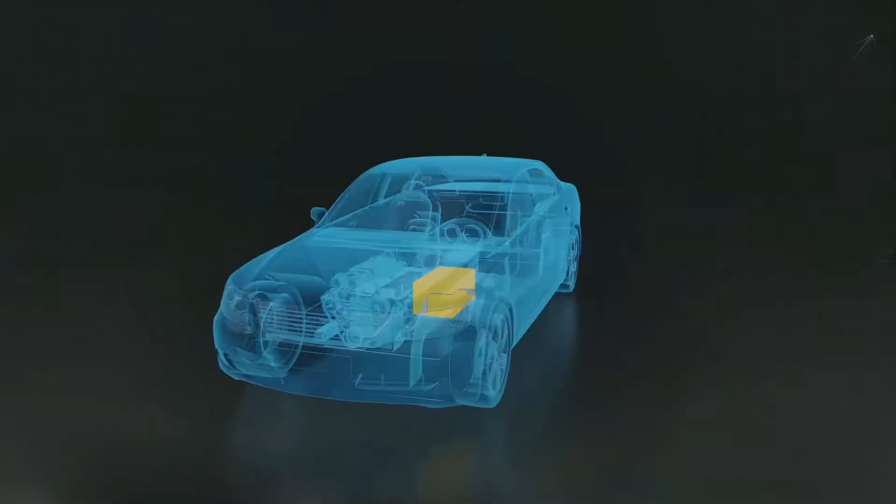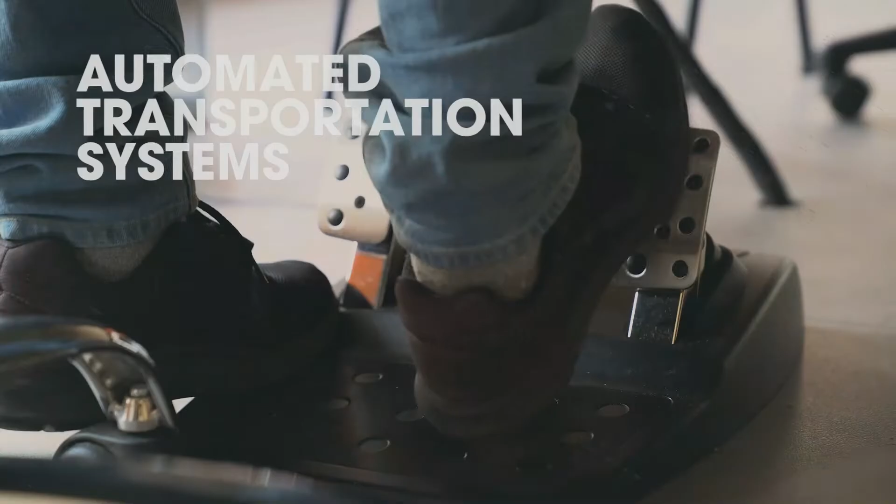Three main research areas are addressed: green and automated vehicles, integrated and connected mobility, mobility and logistics. The challenge is to develop technologies and solutions capable of reducing the environmental footprint through electrified powertrains and chassis systems, improving safety through automated and connected vehicles, advancing automated transportation systems, and city logistics.

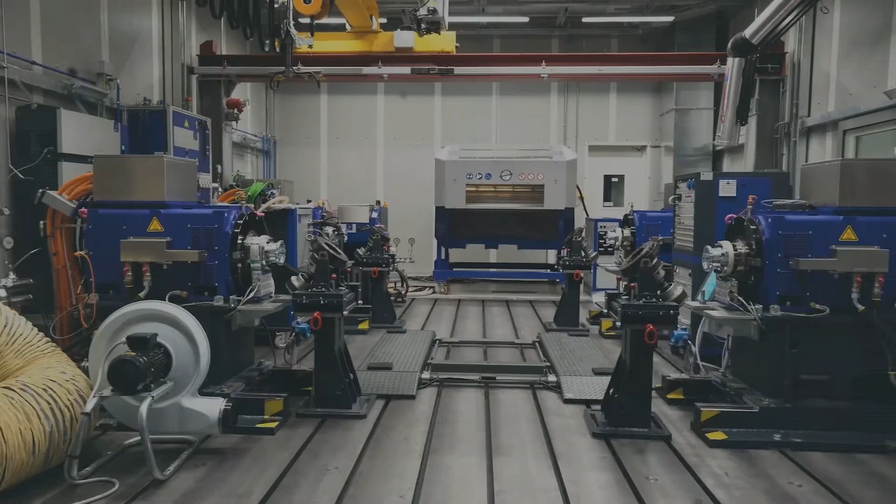To reach such ambitious results, the center is dedicated to the creation of an environment in which multiple skills can be integrated to carry out multidisciplinary research open to innovation and technology transfer.

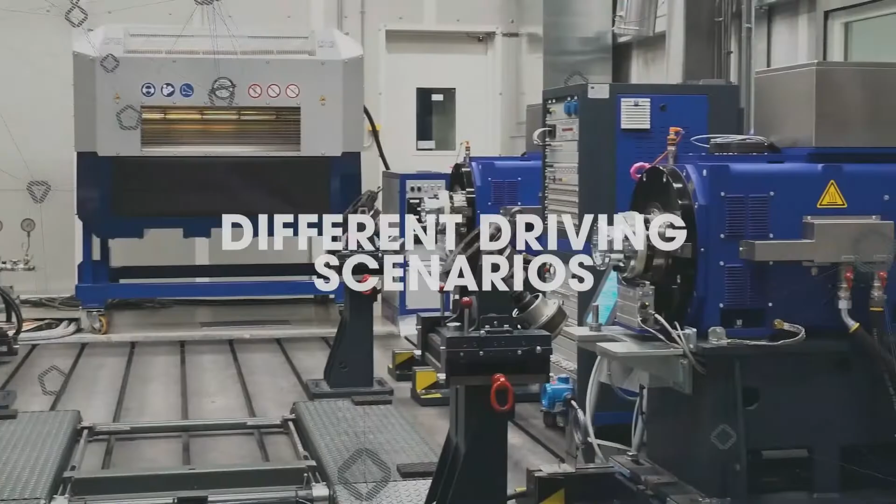The installation of a new test facility within CARS labs allows testing of vehicle and powertrain behaviors in different driving scenarios and road conditions. It is almost a unique test facility available in a university laboratory worldwide.

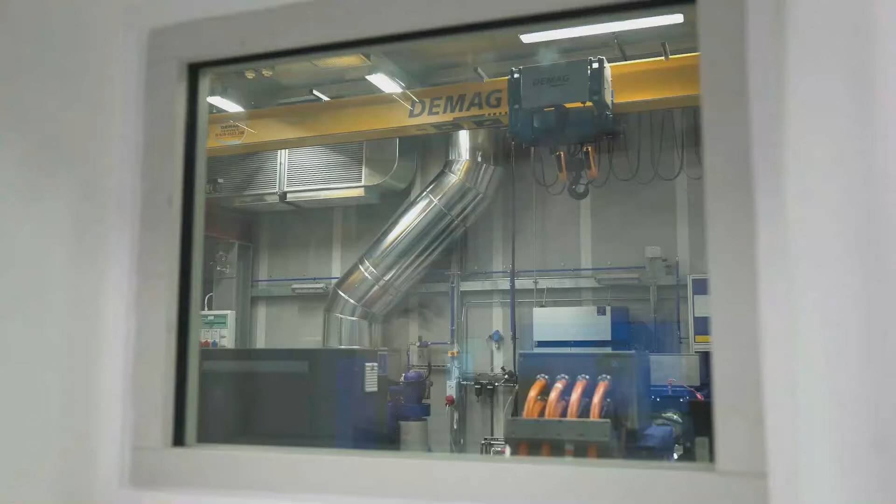The facility is conceived to test both complete vehicles, conventional, hybrid, full electric, and powertrains, or parts of it, to reach a wide range of customers: OEMs, Tier 1 distributors, legal entities.

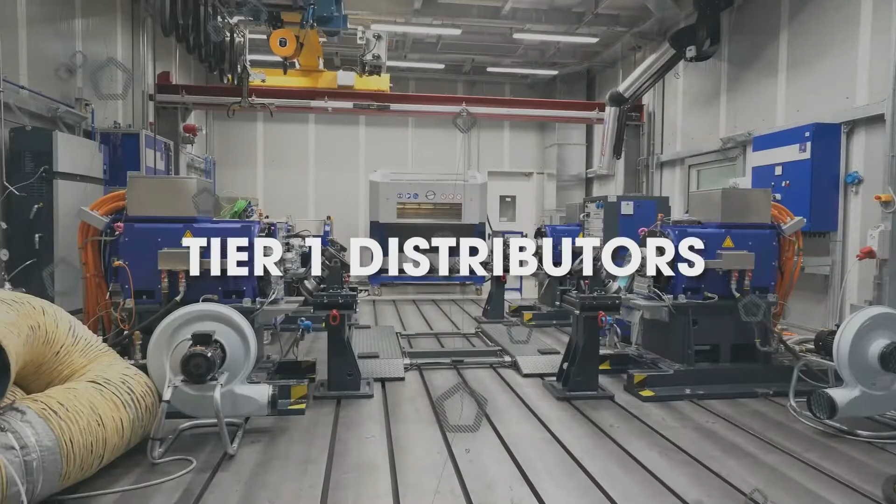The cell allows testing of cars and light commercial vehicles characterized by up to 3.5 tons of curb weight, a thermal power unit up to 375 kilowatts, electric power systems up to 250 kilowatts, and a max speed of 180 kilometers an hour.

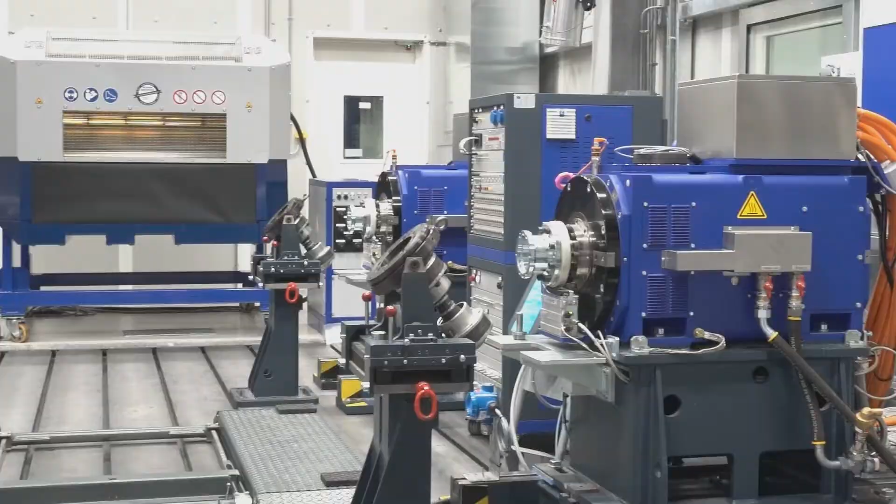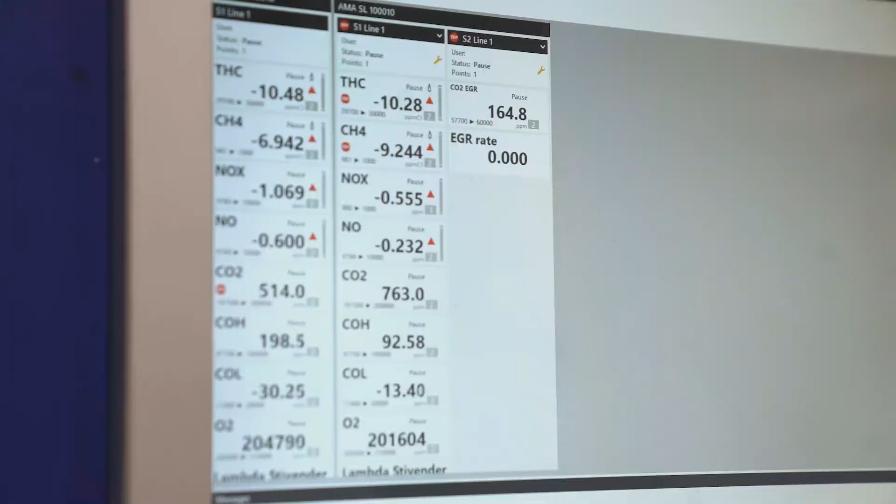The facility is equipped with the following instrumentation: a battery emulator, 250 kilowatts, 800 volts; a fuel measurement device, less than 0.1%; a gaseous pollutant measurement system, AVL-AMA-SL; and a real-time connection device with real or virtual driving simulators, AVL Testbed Connect.

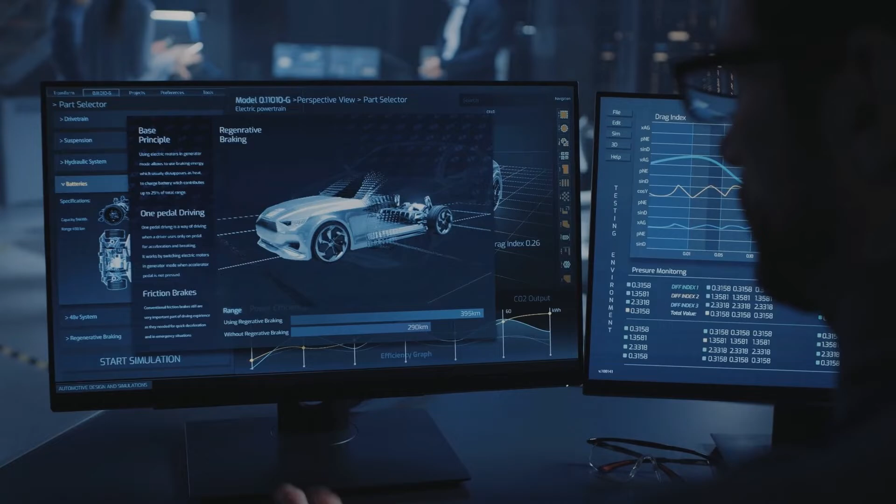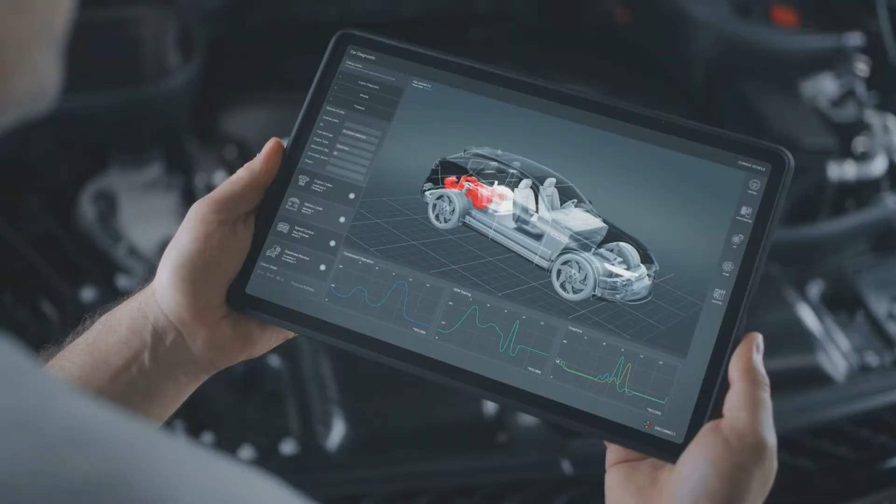Test campaigns are possible both in vehicle and powertrain configurations. In particular, the cell capabilities allow performance tests in real conditions. Efficiency and energy consumption can be derived for homologation and other relevant driving cycles. Furthermore, validation of control strategies for the energy management system and hardware-in-the-loop tests for real driving conditions can be performed.

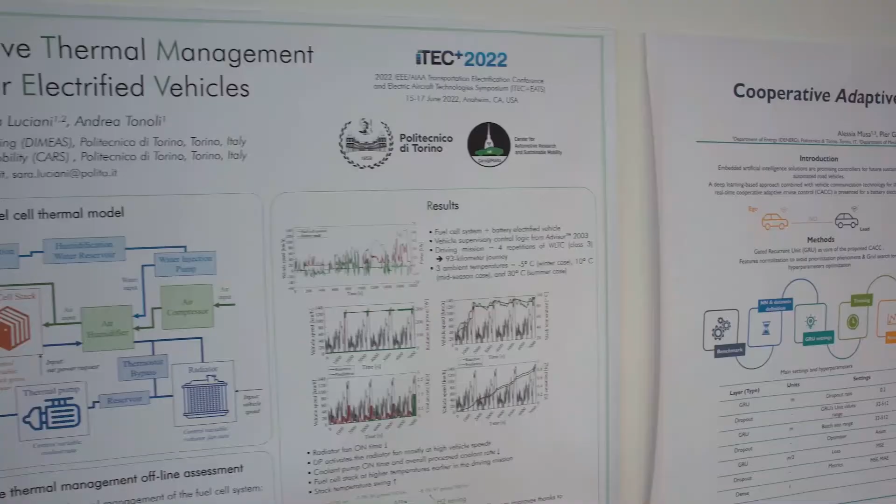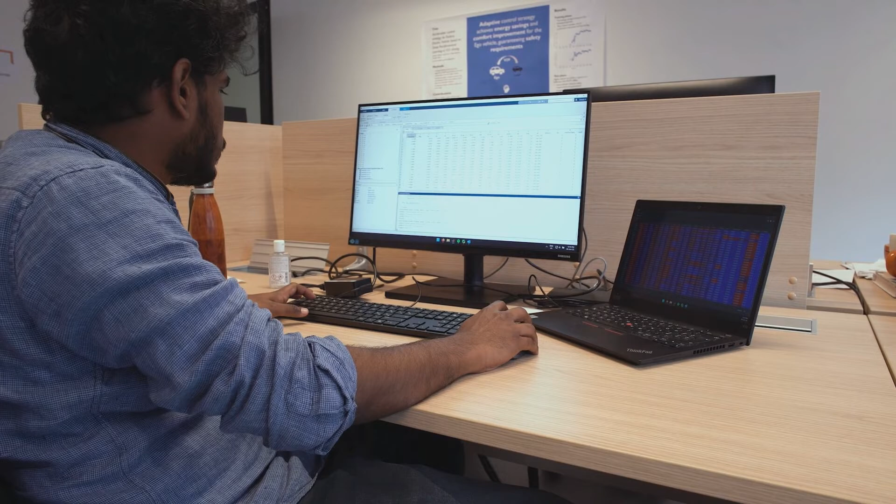Some additional explanation after this movie. Remember that CARS stands for Center for Automotive Research and Sustainable Mobility. CARS is one of the 13 interdepartmental centers established in 2017 and 2018. It was a strong action from Politecnico di Torino.

The conviction was that a multidisciplinary approach should be followed to face the next frontier of research. How to implement this new approach in automotive engineering? We believe this can be achieved by including partner research teams in our research groups, carrying out development plans led also by professors of Politecnico, following a multidisciplinary approach to achieve results with high technology readiness, and performing experiments also at system level.

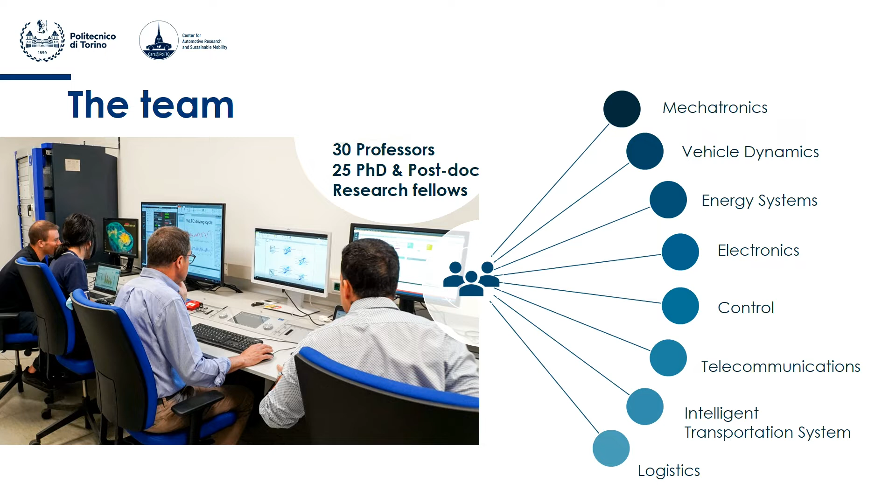Today we contribute in three main research areas: green and automated road vehicles, integrated and connected mobility, and transportation systems and logistics. How? With a team composed of 30 professors and 25 PhD students and postdoc research fellows, with expertise in mechatronics, vehicle dynamics, energy systems, electronics, control, telecommunication, intelligent transportation systems, and logistics.

This work is in strict cooperation with many of the other interdepartmental centers mentioned before. As for the testing facility, starting from now we will contribute with it, helping to shift from field tests to laboratory tests.

This is to be as competitive as possible for Politecnico, but also for our industrial partners. We should remember that today the time to market of a passenger car, from concept to production, is 4 years, so we need to be effective to fulfill this time frame.

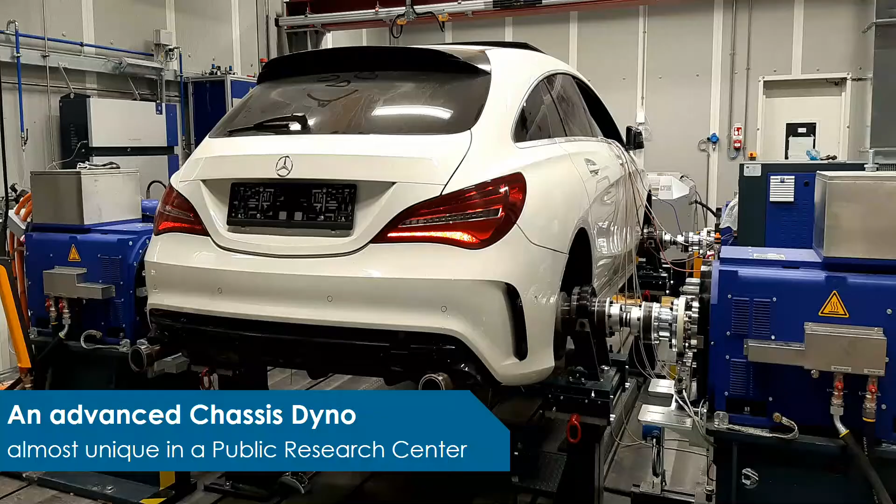To this end, we believe the most adequate infrastructure is a chassis dyno. This chassis dyno is based on 4 independent dynos able to replicate low friction ground conditions independently at each wheel, giving the highest level of flexibility.

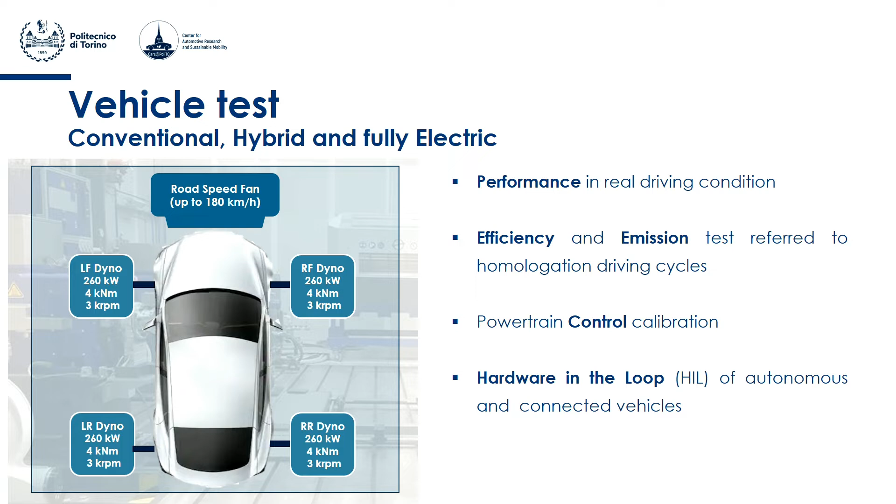The test bed has been conceived to be used in vehicle configuration, to run tests on complete vehicles replicating real driving conditions, to compute efficiency and emissions referred to homologation driving cycles, to calibrate powertrain controls, and to perform hardware in the loop testing of autonomous and connected vehicles.

But the test facility is also conceived to test naked powertrains. The 4 typologies of tests mentioned before can be replicated for powertrain assemblies as well, not only for vehicles.

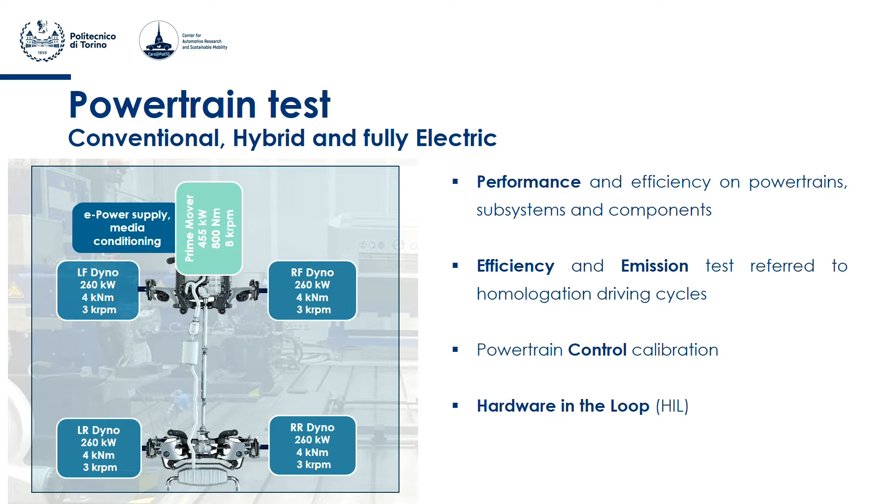And to maintain the highest level of flexibility, we completed the installation with an electric machine, a so-called prime mover, able to replicate an internal combustion engine in terms of stationary torque and higher order harmonic torques.

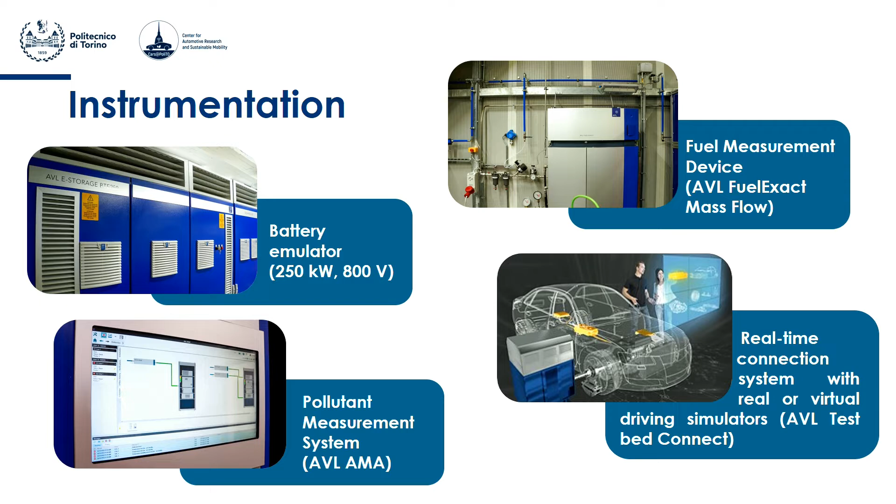The test infrastructure is equipped with a wide set of instrumentation: a battery emulator, a pollutant measurement system, a fuel measurement device, and a real-time connection system that allows connecting the facility with virtual or real driving simulators. This is to widen the typology of tests as much as possible and to meet the needs of our partners and customers.

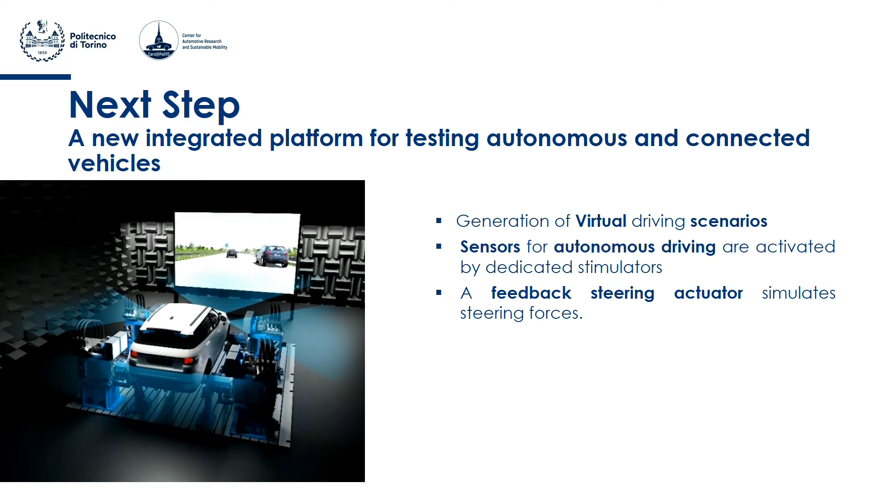Next step: thanks to the funding coming from the PNRR initiative, we will integrate the facility with a new platform equipped with a system stimulating the sensors conceived for ADAS.

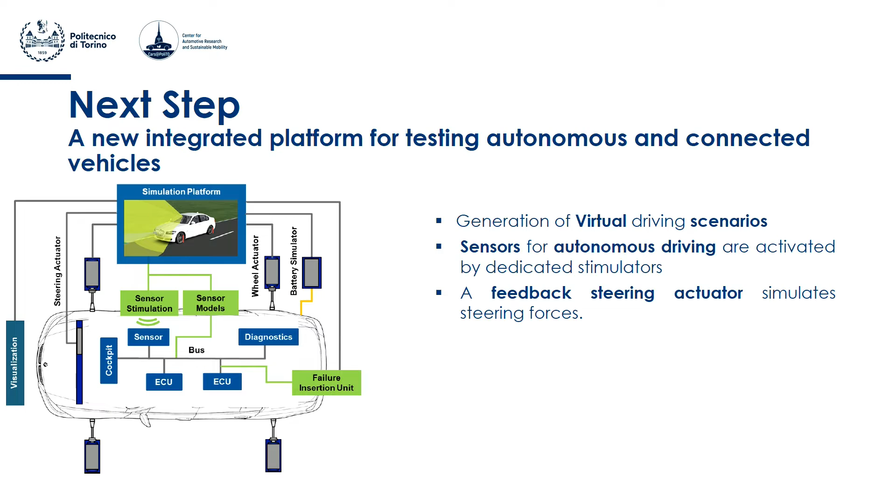With a device able to replicate the steering actuator, since in the test facility it's not possible to steer the wheels, and with a generator of virtual driving scenarios, this will allow running intensive laboratory tests, having a chain in which everything is real apart from the scenario.

We believe this is extremely powerful because the experimental tests requested to validate the technology for autonomous driving are huge.

The executive director of Bosch declared that to validate the technology for autonomous driving, 250 million kilometers are requested, which means more or less 3,500 vehicles involved in parallel for 1 year.

I would conclude that this is almost impossible. So the trend is to move field tests into laboratory tests as much as possible, since they are much more repeatable and can be extensive. We can also run them 24 hours a day.

So to conclude, and I hope that you will visit our laboratory to better understand all the features of this installation, I would conclude by summarizing the typology of possible collaboration entering into our new mindset of collaboration with companies, mainly based on long-term research partnership agreements, collaboration in funded research programs, dedicated research projects, and also the use of the test facility as a service.

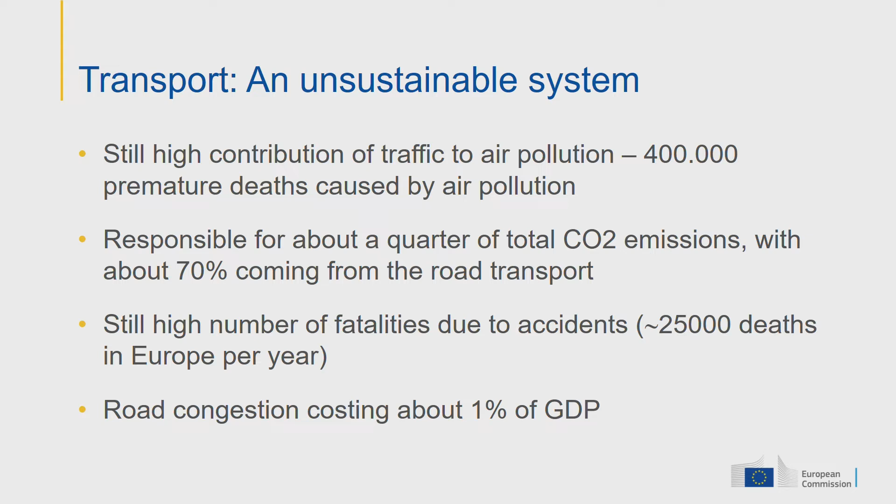So why do we consider that this new testing center is important? We all know that the current transport system is an unsustainable system. There is still a high contribution to air pollution, which causes about 400,000 premature deaths in Europe every year. Transport is responsible for about a quarter of total CO2 emissions, with road transport accounting for about 70% of these emissions. Still a high number of fatalities - about 25,000 people are killed every year in Europe due to accidents, and many more are injured. And then road congestion, which we experience every day and costs about 1% of the European GDP.

So a lot of problems that the European Commission is trying to address with a number of policy initiatives. I've just listed here some of these initiatives: the European Green Deal, the Sustainable Smart Mobility Strategy, and the EU Road Safety Policy Framework. These policy initiatives set very ambitious objectives. For sustainable mobility, we have the objective of reducing CO2 emissions by 90% in 2050, with the phasing out of combustion engines in 2035. In the meantime, we'll have stricter emission limits - we expect the new emission standard to be presented in a few days.

Smart mobility: there is the idea of improving the efficiency of transport by promoting multimodality, so we need to achieve safe and efficient connections between different modal transport systems. Resilient mobility: we have all experienced the impact of recent crises, from the pandemic to other international crises, and we need a transport system that is resilient against future crises like those of the last couple of years. Then Vision Zero, having no fatalities by 2050. So very ambitious objectives that will require time to be achieved, but we have a lot of concrete issues that we have to address right now.

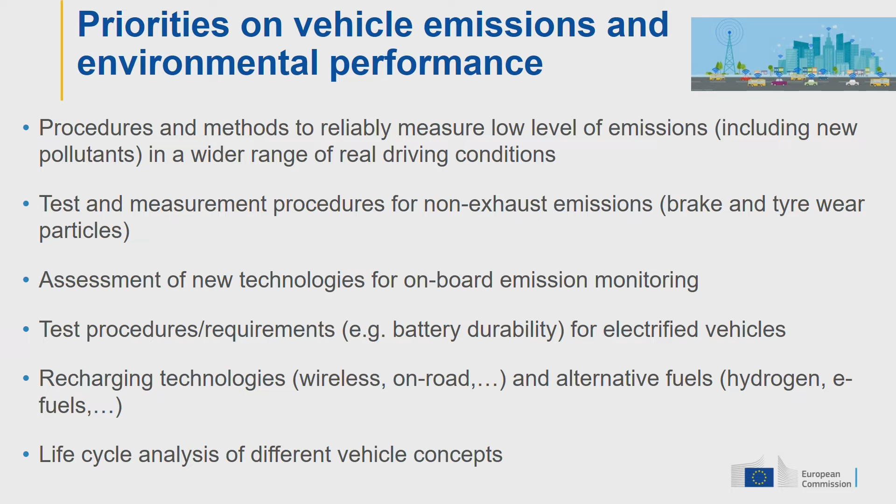Alternative fuels will have to be addressed not only in terms of what comes out from the tailpipe of the vehicle, but also in terms of overall CO2 balance. So we are going towards a life cycle analysis approach to compare different vehicle concepts and different fuels.

Coming to connected and automated vehicles, the main problem is how to ensure that autonomous vehicles placed on the market are safe. Obviously, we cannot test these vehicles in all the possible conditions that will be encountered during their life.

So we need a new approach, new methodologies, for example new simulation tools for the type approval of these vehicles, but very likely we also need an in-service monitoring system which will monitor the performance of the vehicle in order to identify at an early stage a risky situation that requires corrective measures.

We also have to define safety and functional requirements for human-machine interface, for artificial intelligence-based systems, and for vehicle-to-vehicle and vehicle-to-infrastructure communication. So we have a lot of work in front of us.

One important aspect is that we need a huge research effort, but we also need new approaches in research, because we cannot afford anymore to look at the problem from a single perspective. We need, as already mentioned by Professor Amati, holistic and multidisciplinary approaches. Very often this new approach requires multiple competencies that are not always available in a single institution.

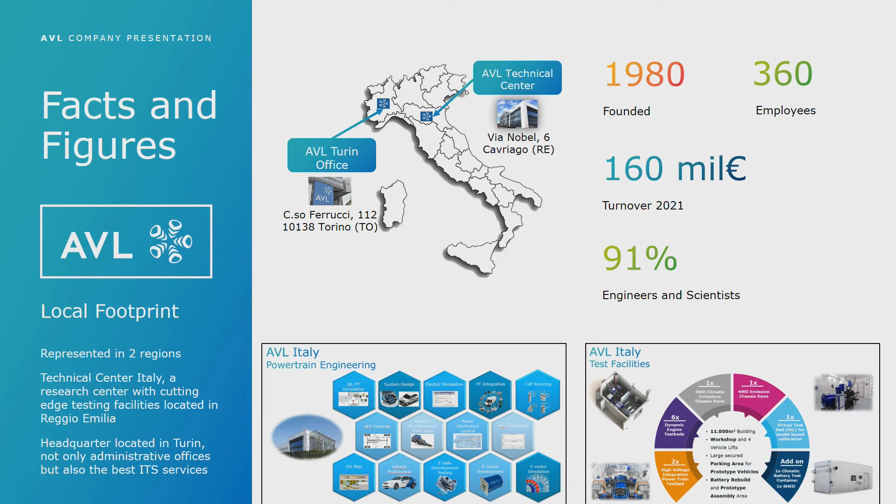On the products, we have a very strong focus on electrification, of course. We do the full portfolio of ADAS and autonomous driving development. Zero impact emission is not just a word for us, so we do development in all directions, also still with internal combustion engines. We do vehicle engineering, and due to the connectivity, we have a lot of efforts in data intelligence. So at the end, our research and development is purely, or mainly, focused on the automotive industry, and also one target of the company is to have more local growth.

So the volume in Italy is very high, and we further invest into local growth of Italy. We're going to hire and build up more teams with regard to new technology. And of course here the universities are playing also a major role. The earlier we work together with universities on applied research projects or even customer projects, the better and the faster we can integrate the university workers or engineers later in the company or in a cooperation model.

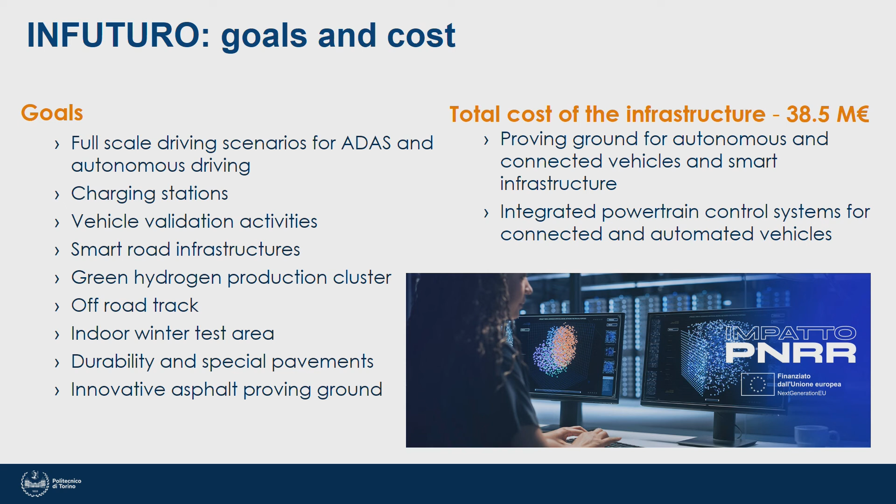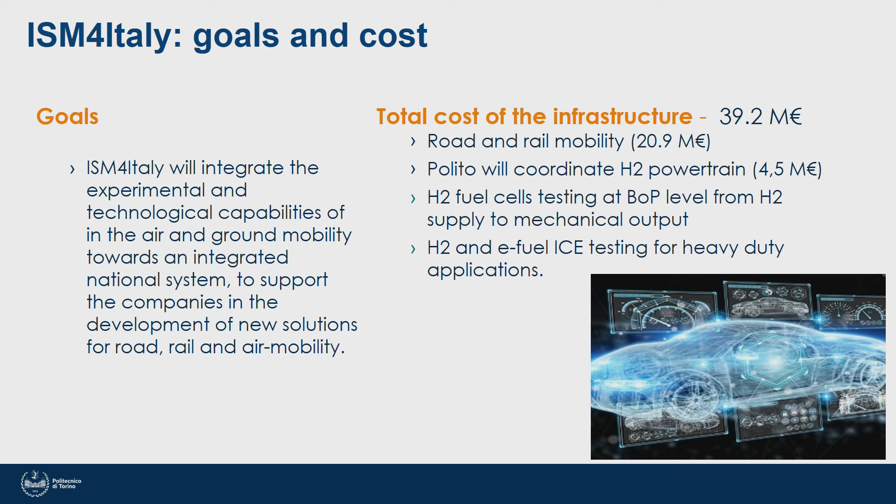Enlarging and updating or increasing its features, it is the one that Professor Amati mentioned before. The second infrastructure worth mentioning is called ISM for Italy. ISM stands for Infrastructure for Sustainable Mobility, and the idea is to insist on creating infrastructure able to support the development of components for hydrogen vehicles. This is a crucial part where some ideas are there, but there is a lot of need for improving the support, developing new solutions, and creating new businesses, because this is also a key point.

These are general ideas. Let me make a brief appendix before closing, hoping to be still in time. All over the PNRR actions devoted to research, I mentioned before that there is an emphasis on creating new researchers, on supporting the training and education of new researchers in the areas selected by these initiatives. This is done by hiring, especially by public bodies like universities, researchers.

These researchers are always intended to work in cooperation with companies, and the Politecnico is doing this activity in cooperation with the partners we traditionally have. There is another action specifically devoted to PhD students. PhD students, I think, can play a key role in strengthening the connection between university and companies and industries, and there are special actions by the ministry to promote and economically support this cooperation even at the PhD level.

So we just launched a call for new PhD grants that are going to start soon, and we hired about 100 PhD students. These PhD students will benefit from a grant paid one half by the ministry, one half by a company, and the topic for the activities of these PhD students has been identified in cooperation with specific companies.